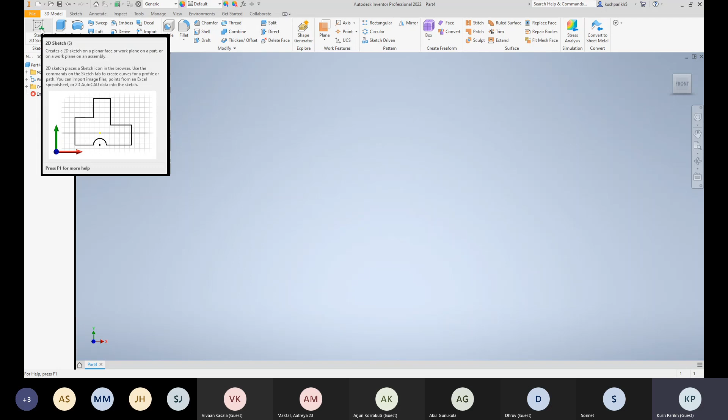So you want to start off by pressing Part, if you didn't see me do that already. Once you press Part, you want to press Start 2D Sketch. This is where you'll be making your two-dimensional shapes and all that. So click that button, and you'll see three different planes. For our purpose, we'll just use the XY plane, which is this one. So click on that.

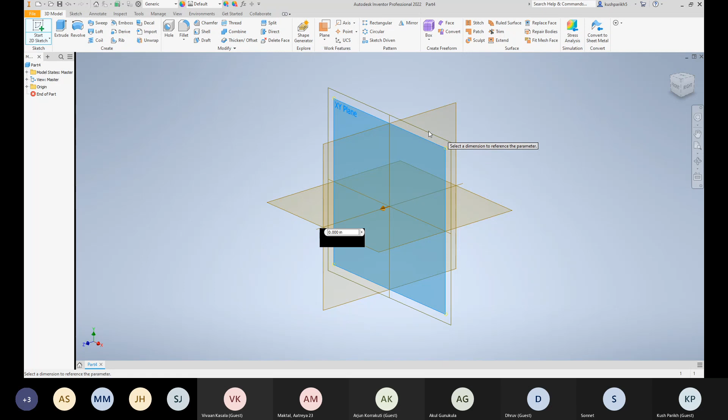I think my computer's lagging a bit. Alright, there we go. So you guys see that, right? Alright, so I'll go over line, circle, arc, rectangle, and maybe a few of the constraints. First, in Autodesk, if you want to zoom in and out, use the wheel on your mouse. Everybody should have a mouse, or else it'll be really difficult to use Autodesk. Also, if you want to move around side to side, press the wheel down and move your mouse.

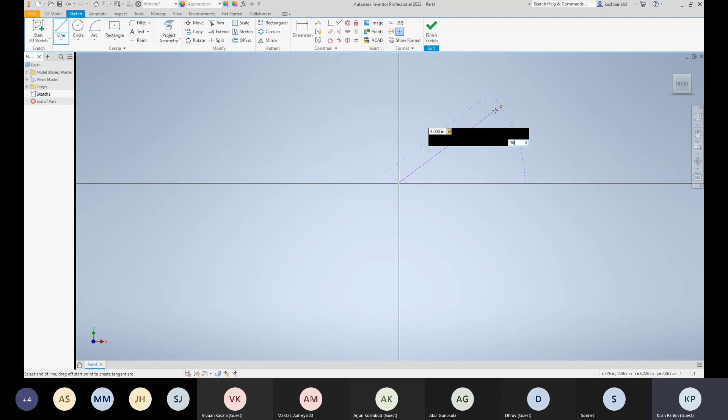Alright, let's start with a line. Press line, and then we can make a line like this. You'll see there's two different dimensions this type of line will take: one is the length, let's make it 4 inches, press 4, then press tab. And then the angle, let's do 30 degrees, press tab. Then exit, and press escape if you don't want to use the line tool anymore. As you can see, there are two dimensions, 4 inches for length and 30 degrees for the angle. This line is black, which means it's fully constrained. At the bottom right it says it's fully constrained, and if it's not fully constrained, the thing will appear purple.

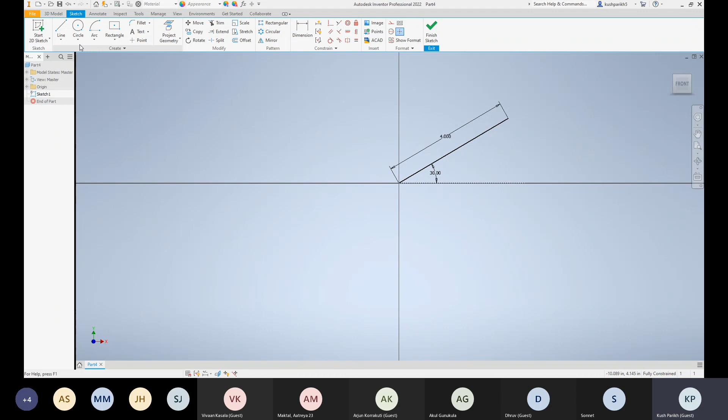Let's do a circle. Let's start at the origin. This only takes one dimension, let's just set it to, I don't know, 8. You'll see the circle is also black, meaning it's also fully constrained. Let's do an arc. For the arc, make sure to press center point arc, not the 3-point arc. We'll do center point.

Pick your center point first. Let's do the origin. By the way, the origin will always have a point automatically on it, so you want to be sure not to delete that, or else it'll be really difficult to put points at the center. So let's put one parameter as, I don't know, 5.

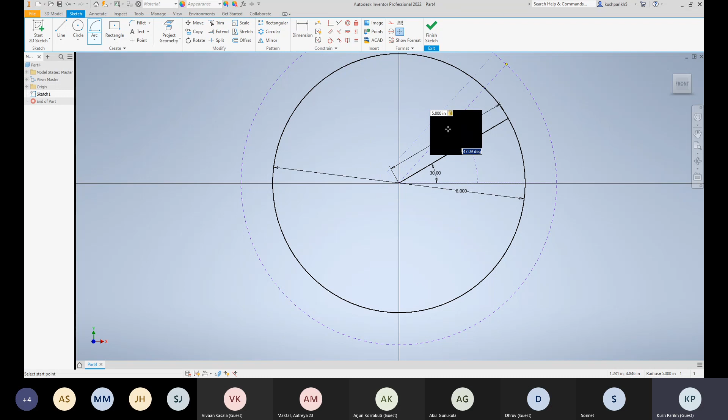Press tab, so 5 inches. And then the angle you want to start at—let's start at maybe 45 degrees. Press tab, click away.

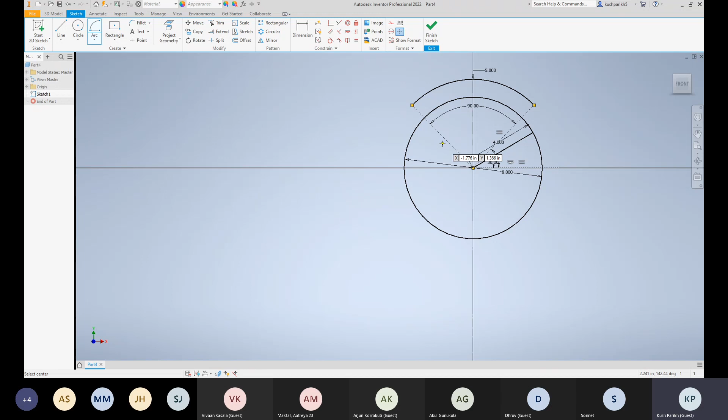And then you want to see how much more you want to go. So let's say I start at 45, let's go 90 degrees more. Press tab, then exit. You'll see over here that you have an arc. It starts at 45 degrees, ends up at 135 degrees, and from the origin or the center, it's 5 inches away.

All right, so that's an arc. Also make sure to press escape every time you're done using the tool.

Rectangle—let's try to do a 2-point center rectangle, so this one. Also let me know if I'm going too quick for you guys to follow, if you want me to do something again. So press that, and for this type of...

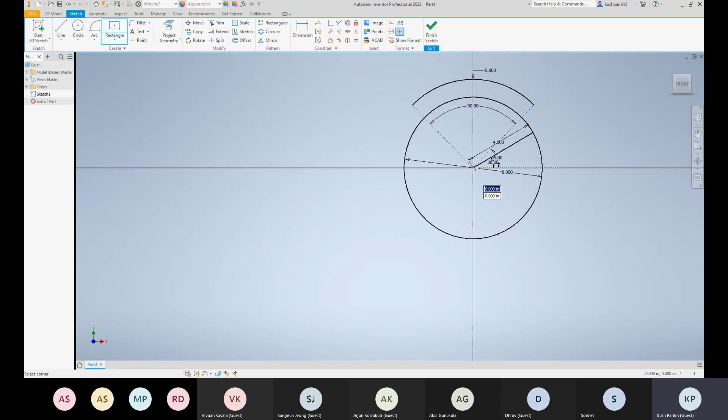All right, cool. So this type of rectangle takes 2 different inputs. One is going to be your center point, which I'll do as the origin—actually take 3. And then you want to figure out the length and width of your rectangle. So let's go 8, press tab, and 10, press tab. Right, so that's your rectangle.

Click away, and once again, your rectangle should be black, which means that it's fully constrained.

Press escape. Let's see, Sonnet, Dhruv, do you guys just want me to show some of the constraints now, or?

Yeah, I think—hold on, so you covered everything before, right? Let's go to questions now, because does anyone—make sure that everything we covered so far is understandable. Does anyone have any questions of everything we covered so far?

I can also—Sonnet, or you can also do a separate demo, or will you draw something else? Okay, wait, so you're telling me to draw something else? Yeah, you can draw something a little bit more complicated. Okay, that's fine. All right, so if you guys all understand this, we can move on.

So, okay, if I want to delete something from this, there's 2 different ways you can do that. One is starting at the top left and pulling down—that makes a red box. And the second way is to go from the bottom right and pull up, right? And that's a green box.

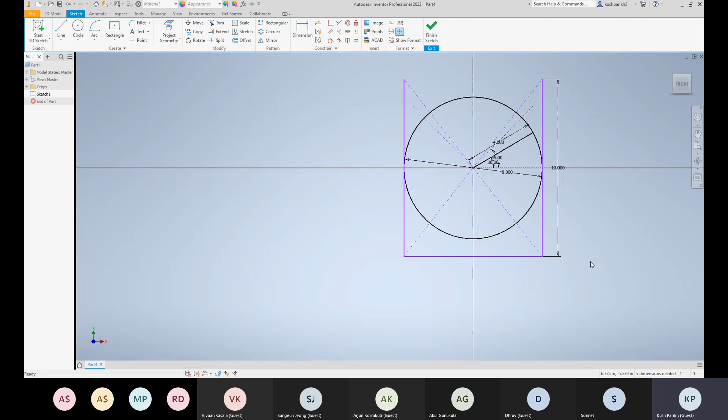It seems like the top of the rectangle is also entirely part of that. And if I want to go from the bottom right and pull up, then everything that touches that box will get deleted. So if I do this, then all of this gets selected and I can press delete, right? And same thing here, I can do this, delete. So everything's gone, right?

Okay, Sana, why don't I just try to add maybe a face to the snowman and go over that in a little more detail. Yeah, sure. What do you think?

Okay, cool. So we'll start off by making a snowman again. We'll see if we can add maybe some sort of face using the tools that we just learned.

Also, another thing before I go on is that if you don't set your dimensions at the beginning like this—let's say I just do that—then it'll appear purple. And the way you make it go from purple to black is you fully constrain it, using the dimension tool.

So you want to click on the dimension tool, press the circle, and then you'll see it's 9.077 inches, and you want to change that to, I don't know, 8. Press enter, and now I guess you want to give it a point as well for where it's centered. So let's see.

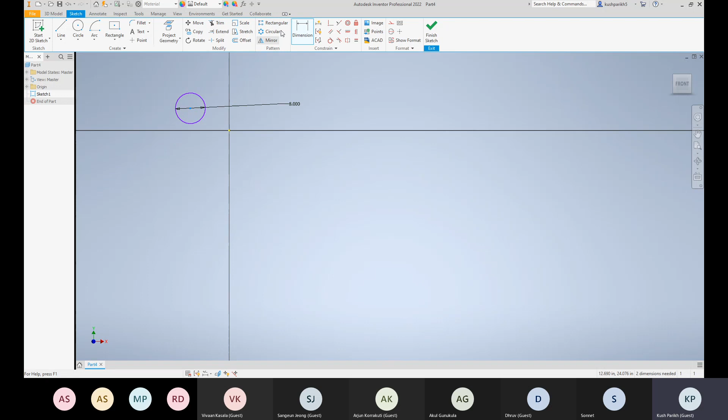I don't know, why is this not constrained? Okay, let me redo this.

Say I start this just over here and I don't give it a dimension. Then I press dimension and click on this, and let's say I want to change it to 40. Press enter, and it's black, right? Every time you don't give all the dimensions you need, it'll appear purple. If you want to change it to black to make it fully constrained, you have to click on the dimension tool. Okay, now that that's over, let's try to make a snowman.

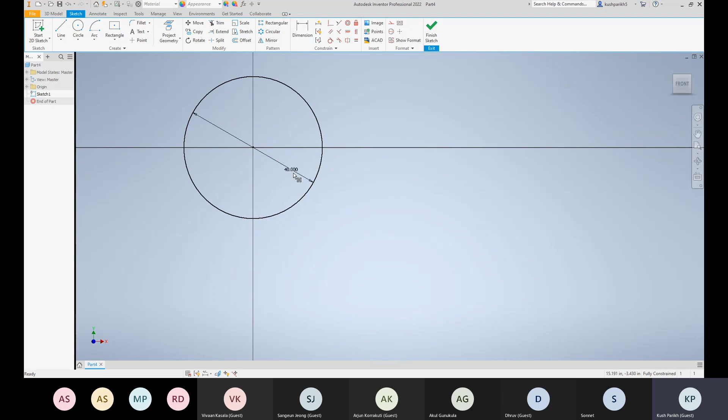Actually, we can keep this, so let's say this is 40. Let's make another circle, like this—let's make it 30. Let's make another circle, 20.

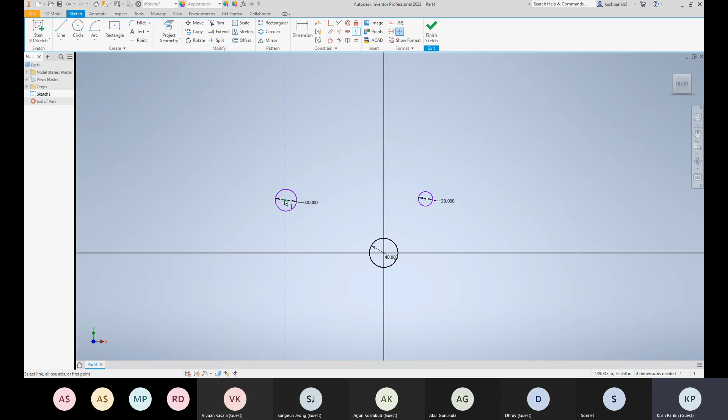Now what I want to do is put these 3 circles on top of each other. The first step is to press escape, then use the vertical constraint tool. Press the center of the 30 circle and the center of the 40-inch circle, and they'll be aligned vertically on the y-axis.

You want to do the same thing with the 20-inch circle, so press the center of that and the center of the 40-inch circle, and you see how that's all vertically constrained. Then escape or unpress that, and make sure all 3 of these circles are tangent to one another.

Let's do tangent. Press tangent, and now let's press this—the 30-inch circle and the 40-inch circle—and you'll see that they're on top of each other now. Notice also that both of them are black, which means they're both constrained.

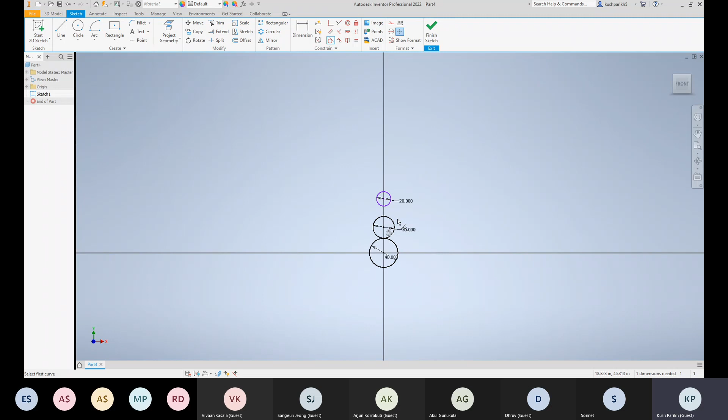Let's do the same thing between this circle. Press the outer part, then press the outer part of this, and both of them are tangent now. As you see, all of them are black, which means all of them are constrained. At the end of the day, just like Dhruv mentioned yesterday, you want to make sure everything is black.

Okay, so now let's try to add a face. Let me escape this. Let's see, what do I want to do? Let's try to add 2 eyes. So let's put a circle here, let's make it 6. And let's do another eye over here, let's make that 6.

All right, so now we have these 2 eyes. Now what do we want to do with the eyes? Also make sure to press escape after you're done using the tool. I guess we have to make them both symmetric to the center.

So what I'll do is create something called a construction line. A construction line is something that's not part of the actual sketch, but it can be used to reference other shapes onto that line. I'll show you what I mean.

First, let me just create a line. Let's say it goes from the center to the center, the origin. All right, then press escape. You'll see this line is already black, which means it's fully constrained.

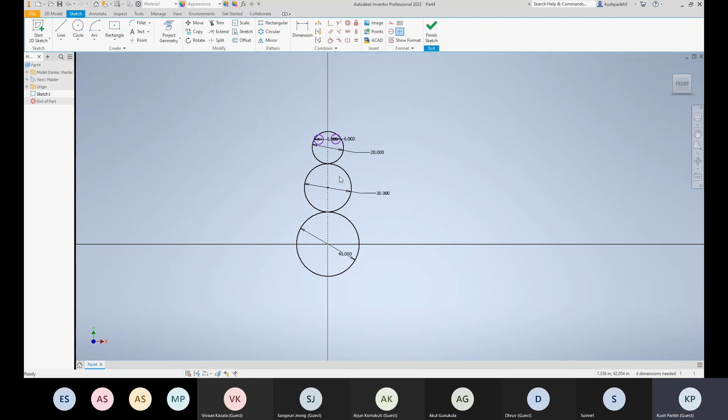What you want to do is hold shift and then press this line, and then press this over here—it says construction, you want to press that. If you press that, the line should become dotted, which means the line is not going to be part of the actual sketch, and it's just going to be used to reference.

So now we have both of these circles, and let's make them both symmetric to this line we did over here. We'll use another constraint tool called symmetry—press the centers of these 2, and then press this line.

Press the construction line. This is the line you want to have as your axis of symmetry. Press that. Okay, cool. So now both of them are symmetric about the center line.

And now, what do we want to do? Let's make sure the eyes are inside the actual head. The way we do that, first make sure to press escape, and then we can use the dimension tool.

These are purple again, which means they're not fully constrained, so we can still edit the dimensions between them. So let's click the center of this circle.

Wait, Kush. Before you dimension them, click escape. I'm going to show you something. Drag the center of a circle outwards, just one circle.

So you guys see how when he drags one of the circles outward, the other one moves too. No matter what he does, the two circles will be symmetric. That's what the symmetric constraint he used does.

It just didn't move there because it was already pretty well placed, but if he changes the location of one of the circles, the other one will change. Okay, yeah, all right, cool.

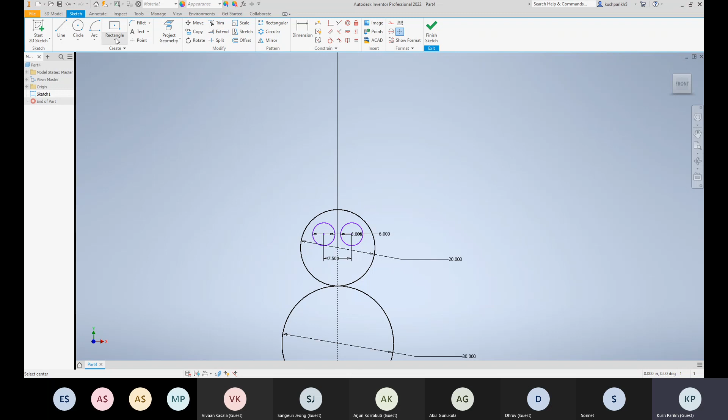So let's use a rectangle. Make sure to press 2-point center on the rectangle. Let's have our center at the center of the face. So right here, the green dot, press that, and then we can make our nose.

Let's see, how do we want to do this? We can do like 4 and 2. So press 4, press tab, then press 2, and press enter. You'll see this nose rectangle is already black, which means it's already fully constrained. Let's press escape so you don't make another rectangle.

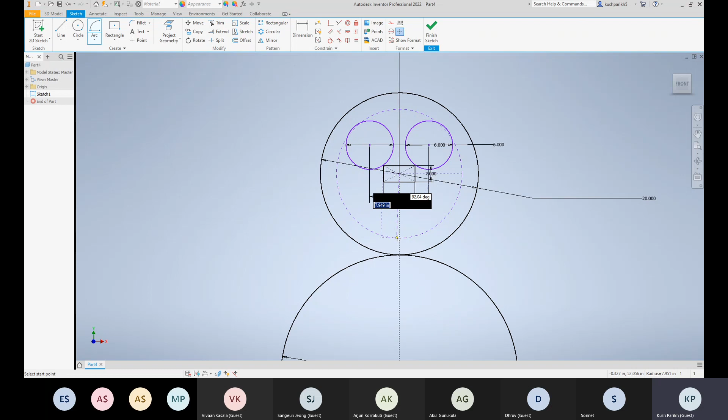Let's use the arc tool to make a smiley face. For the arc, make sure to press center point arc once again. We'll also have our center at the center of this circle. Let's just do 8 inches for the radius.

Press tab, and let's start this one at 0 degrees. Press tab, and then we want this to go all the way to 180. So 180, and press tab. There we go. As you can see, the arc is already black, which means it's already fully constrained.

So the last thing we can do for this smiley face is constrain both of the eyes. One of the ways we can do that is create a construction line between these two eyes. So press line, start from the center of the left eye, go to the center of the right eye, select that, and then press escape.

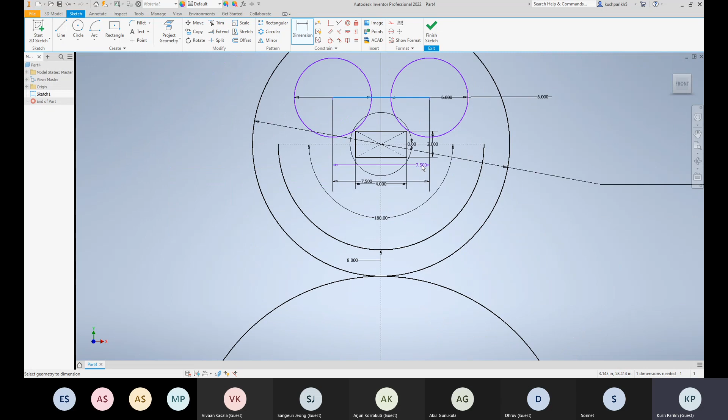So for this line, what you want to do is take the dimension tool and press the center of this line and take it—oh shoot, what did I press? Let's see. Do you guys know I can press the center of this line?

What's up? What do you want to do? Basically I want to constrain these two eyes, which are symmetric to each other. Didn't you already hit the symmetric constraint?

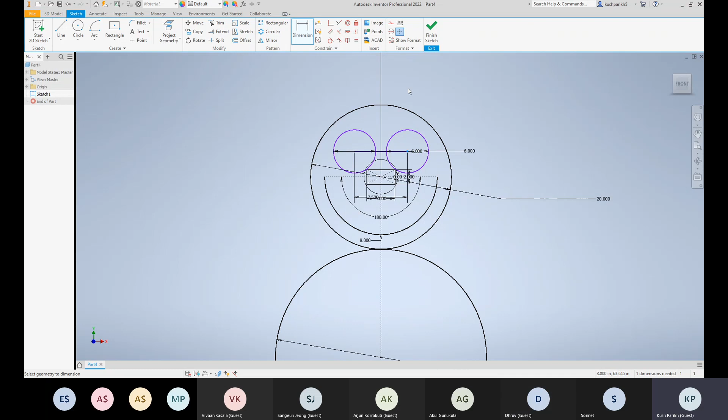Yeah, but it's not fully constrained yet, it's purple. That's because it can still move up and down. Oh, okay. So what do you want to do? Maybe just constrain it somewhere, put it somewhere.

Okay, so what you can do is see that dot at the center of the black circle? Make it coincident with the line. That line, yeah, that's it. All right, go ahead.

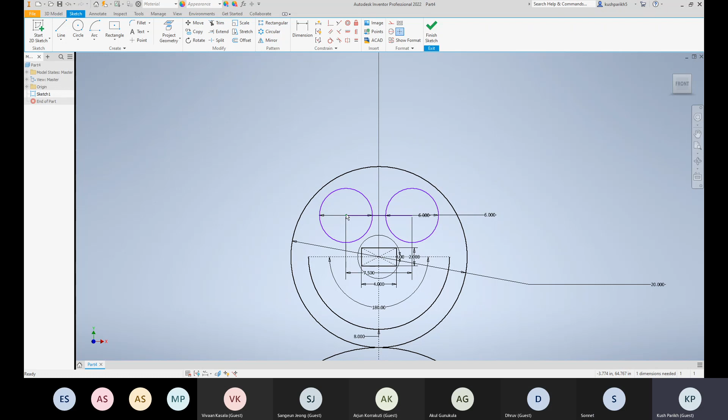Use a construction line. This is a good place to show them how to use construction lines too, if you want to do that. So you guys see the line I made between this left circle and this right circle? You also want to make that a construction line since you don't want it to be part of the actual sketch. Let me zoom in a bit so you guys can see.

What you want to do is hold shift and press this line, then press this button over here which says construction. So if you do that - okay, it did not work. Just select it and click the constraint. Wait, it still didn't work.

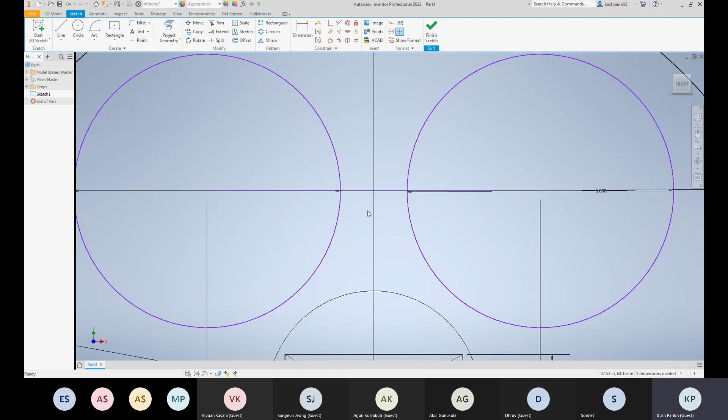Click the constraint first, straight. Wait, are you selecting the line or the dimension? Oh wait, I'm pretty sure I'm selecting the line. Okay, so click escape first.

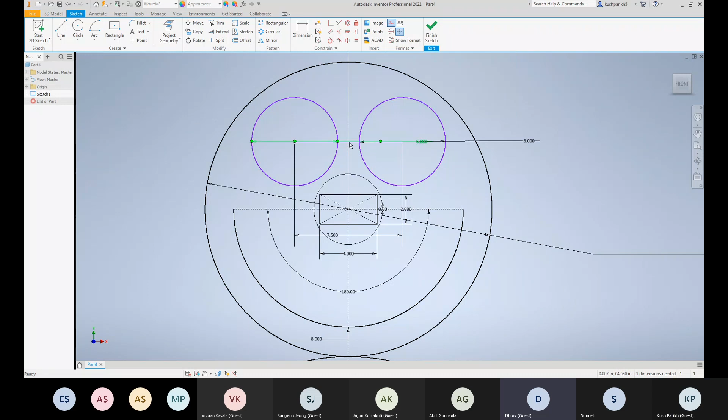Click the constraint, like the red thing at the top. Right, now click line. Wait, constraint or construction? Yeah, that's good, construction, that's good. I think you might be selecting the dimension.

So try moving the dimension out, by the way. Grab that 6 and push it up. Just move the dimension away. Wait, what? Okay, hold on.

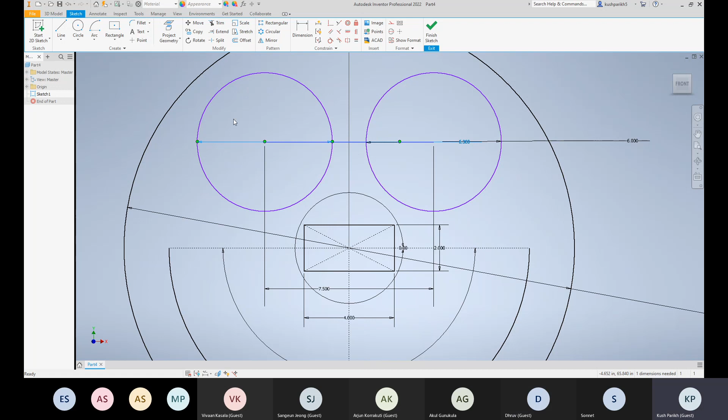Okay, stop moving. Yeah, okay, let me try to undo what I just did right now. Sometimes you might want to undo what you're doing.

So again, to do that, maybe select the bottom right thing. I'll select this dimension and press delete. All right, let me try this again.

So, line from center of this to center of this. Press escape, then hold shift, press this line, and then press construction. Okay yeah, there we go. So you see this is a dotted line now, which means it won't show up in the actual sketch.

Also define that left circle - it's not, the 6 inches is gone. Define the line, the left one. The left circle - the diameter is not defined. Oh okay, got you, okay yeah.

So sometimes I accidentally deleted the dimension for this. Okay, press dimension, press the circle, and make it 6. All right, okay, so now we have a construction line, and let's move it a certain distance.

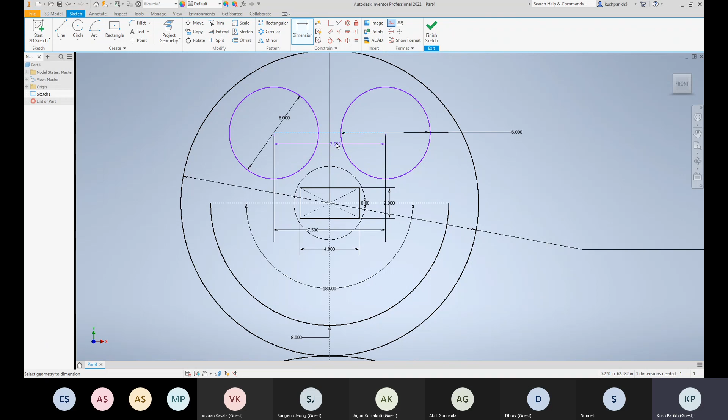Let's move this line, which is connected to these 2 circles, a certain distance away from the center. Press dimension, which I already have selected, press the line, then press the center. You'll see this dimension pop out, and you want to edit that to, let's do 5. There we go. Okay, so now both of these circles are black and everything is fully constrained.

So if we were to zoom out, I'm not gonna lie, the snowman probably looks a bit ugly. But once we start making everything 3D, once we do extrusions and all that, it'll start to look a bit better, especially when you can change the materials.

Kush, you can honestly take it farther and show them how to add buttons to the body and arms and a hat, because it's just more line practice. You guys should definitely pay attention, because you'll be drawing something for homework comparable to this in difficulty. So when Kush is going over steps that seem redundant, it's giving you more practice in preparation for homework. Okay, press escape, exit the dimension tool.

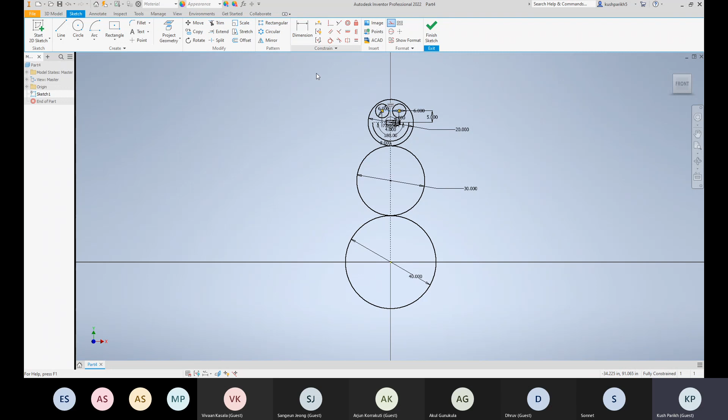Okay, so first, let me add a button to this snowman. Press circle, and maybe just add a random button here. Actually, you know what, let me not do that. Let me just make the button here, and then we can vertically constrain it.

Let's give this a dimension of, I don't know, 5 inches. And then we can move this button, or vertically constrain this button to the center. So unclick dimension, press escape, and press vertical constraint. And press the center of this circle to, I guess, here. All right, there we go.

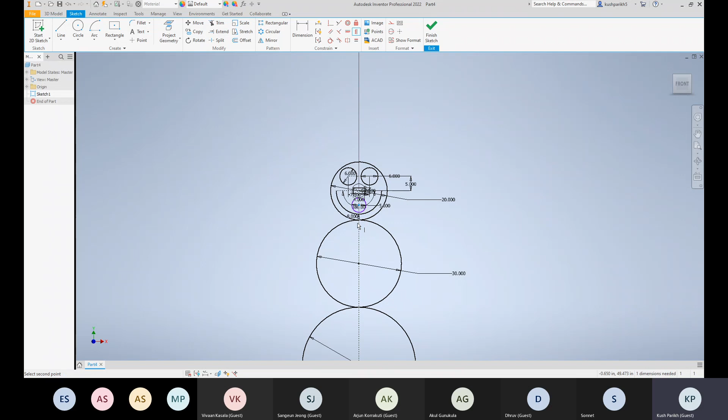So now, I guess we can move this. Let me press escape and then move this down. Move this over here. So instead of continuously making more and more buttons, we can use a tool to make multiple in a row. Do you guys remember which one that was called?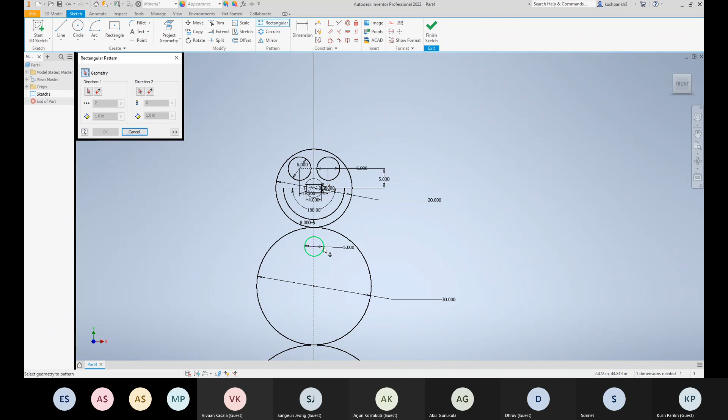All right, so we can use a rectangular pattern to add multiple in a row. So let's see, you want to press this circle and press direction.

All right, there we go. So once you press that button, it'll show a direction, which is down. So you don't want the buttons to go up, you want it to go down.

And then we can choose how many we want. I guess you can use a bit of guessing here, how many will fit. I'm gonna guess that maybe 4 will fit. So I'll do that, and you can choose how far you want them apart.

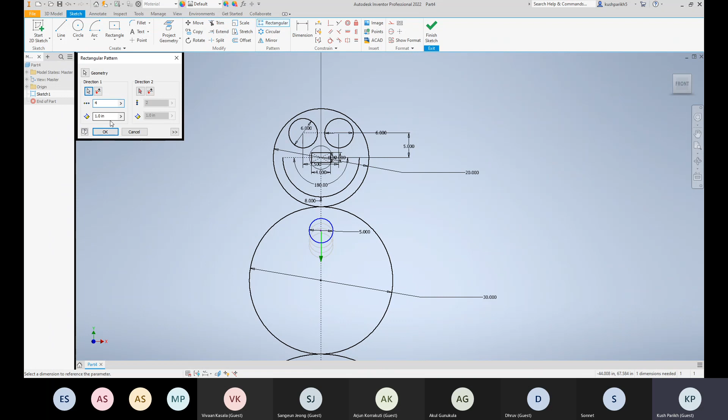So obviously 1 inch, I don't know if you guys can see this, but it shows kind of a gray outline of where the buttons will be. Obviously 1 inch is not good enough. Let's make this 6.5. Yeah, I guess that looks good.

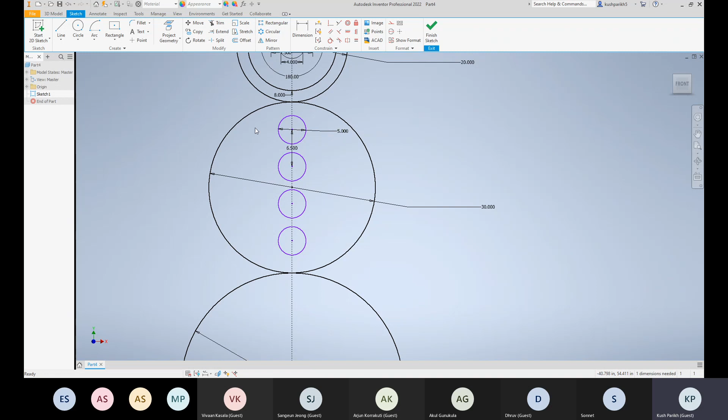And then press OK. So now these buttons are all in a rectangular array on the body. That's one of the ways you can use the pattern tool to add more instead of creating multiple and then putting them in the center. You can just use that tool.

Okay, I don't know what else I can do. Let's add a hat to the snowman. Why not?

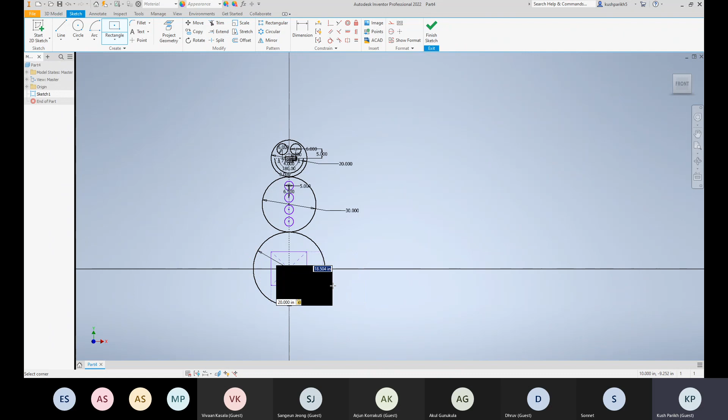Let's see, use the rectangular, let's use 2-point center. Let's make this the same diameter as the top one. So let's do 20, press 20, tab, and then I don't know, 10. Okay, yeah, there we go.

Oh shoot, I constrained this, didn't I? Okay, let me undo that. So let's just make a random one, like over here, press 20, tab, 10, tab. All right, and now this is purple, so we can still move it around if I press escape.

So what we want to do is vertically constrain it to the center and then make them tangent to this head. The way I'll do that, it's the same thing. Vertical constraint, press the center, and press the center of this, and then escape. The tangent tool, press this and this. Ah, there we go. Okay, so that's the hat.

I guess we can have like a narrow top, so we can add one more rectangle. Let's do that. Let's make this 10, tab, 20, enter.

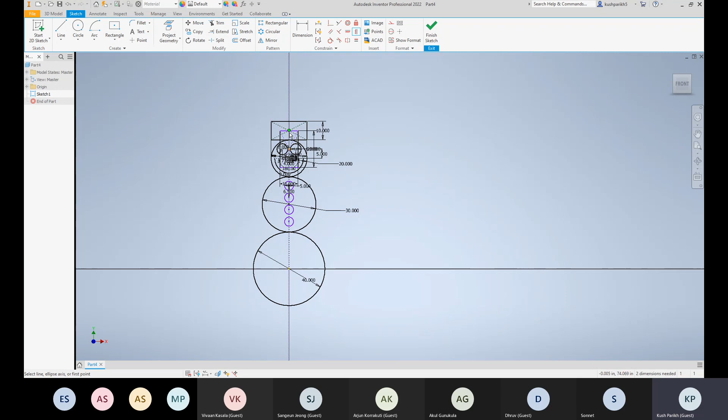All right, and then let's see, press escape, vertical constraint, press the center, and then center this. There we go. That was actually probably a bad idea. That's fine, press escape. Okay, we can move this up and down, so that's good.

And then I suppose you want to make this tangent to this face as well. So you can press the tangent tool, press this side, this side, this side, and this side.

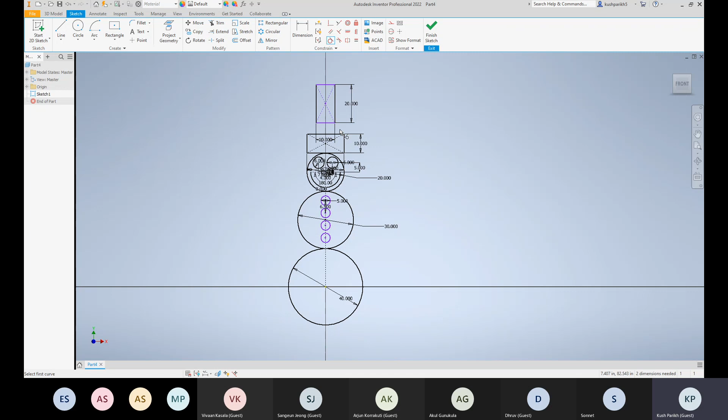I wonder why it's not working. I wonder if this works. Okay, yeah, there we go. So let me undo that.

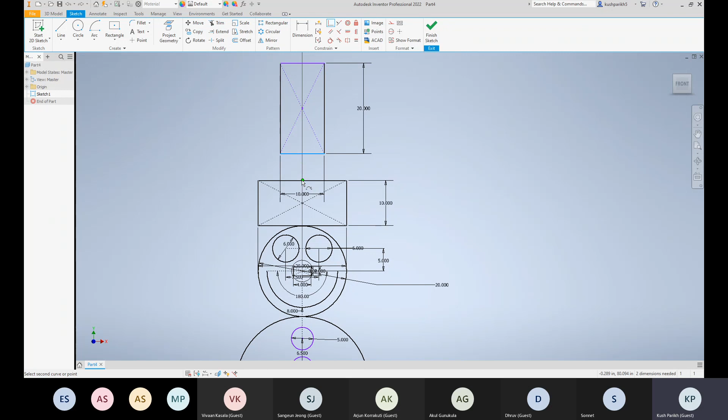All right, so another tool you can use is the coincident constraint. That'll just put two faces together, or 2 points in a line together. So you want to press that, press this face, and then press this point over here, and it'll go on top of each other. And I guess I added a hat. What else?

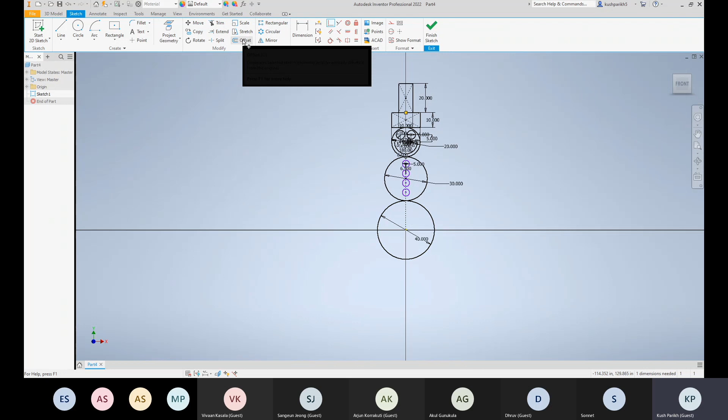Maybe we can add a little bit more detail. One of the tools you can use is offset. Let's say you want another circle to go inside this circle and make it a little smaller. Press the offset tool, press the circle, and choose how much to offset by. If you put it right on top, it offsets by 0 inches, but otherwise it offsets by a certain amount. Let's do 5.

Press enter. So that's fully constrained as well. What else can I do? Sonnet, you don't want me to go into 3D and all that, right? Yeah, I think we're saving that for tomorrow.

If you want to add arms, you can add arms. Otherwise you can just call it a day. Sure, let's add arms. Let's press the line tool again, make sure to escape everything else, and then pick a point on the body and extend it out. Oh shoot, I didn't do it. Let's see, I want it to escape.

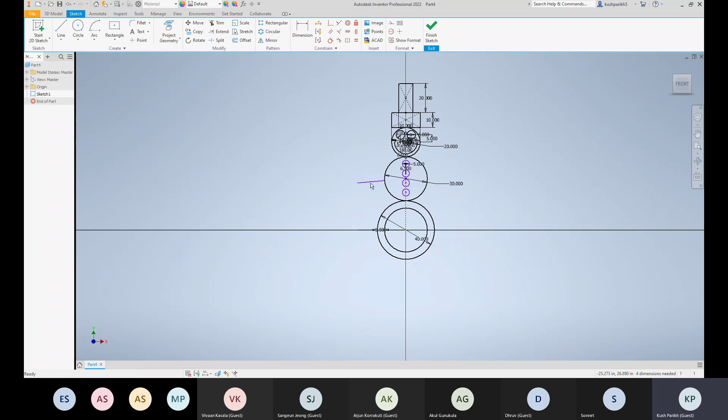All right, let's use the dimension tool. Okay, that's not the dimension I want. Yeah, this dimension. Sometimes you have to press the dimension tool a few different times to get the exact length you want, because sometimes you'll get the vertical component, the horizontal component, or the actual length of the line. So make sure you're editing the actual length. Let's make this 30.

Press enter. Another dimension you can do is the angle between. Oops, didn't mean to do that. Press escape, dimension. Let's do the angle between this. Escape.

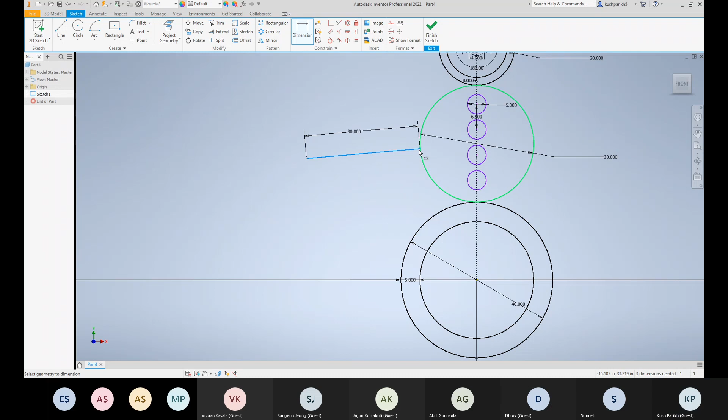Do you guys know why the angle thing is not working? What are you trying to angle? The angle between this line and this point. Yeah, you can't angle between a line and a point. You can only angle between stuff like two lines.

Okay, so in that case I think we just had to set the angle before pressing enter. Sometimes this happens, so you can just delete it. You could also have put a construction line as horizontal and then done it relative to that. Okay, sure.

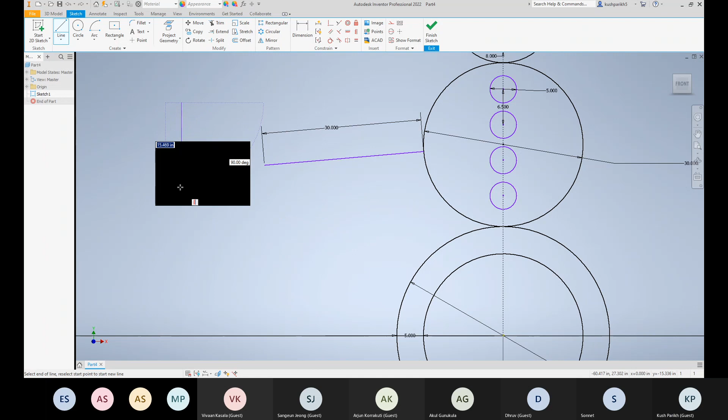Let's press the line tool again. Let's go 90 degrees. We can make this however long we want, let's make it 5. And let's go 90 - so this is going to be a reference. You can move this line right here. Actually, we can press the tangent tool - press this, and then right over here, and make it tangent.

Sonnet, do you know why this is not working? Tangent. I think the lines might have to be touching, right at this point. Do you know how? Because if I press tangent, it just doesn't work. So I could just extend this line. Hold on.

Okay, it already exists. Let me redo that. No, you don't have to delete it, you can just double click the original dimension. Oh okay, nice. Let's just make this 50.

Do you want to show them how to change metrics, like change measurement systems? I personally don't know how to do that. Okay, yeah guys, so in the edit dimension, can you double click that for a sec? Like any of the measurements for dimensions, like 50 or 30, that works. You guys see how it says 30 inches? You can change the inches part to say centimeters or something like that.

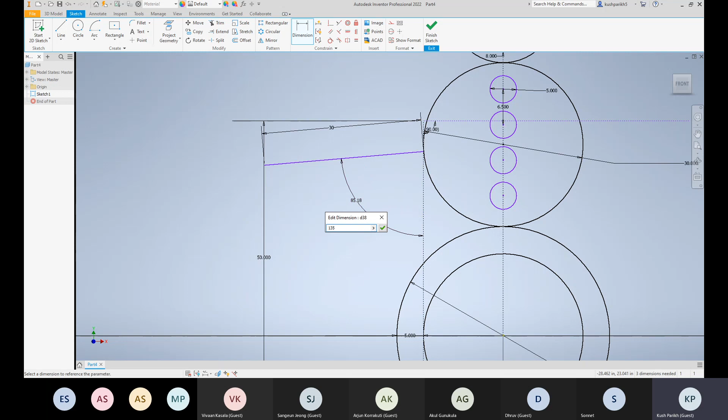Press dimension on this line, and then this line, and then you see an angle over here. So let's make this angle, I don't know, 135 degrees. Press enter. Okay, so now you see this arm is kind of going up. And that's, I guess, what we want, right?

And we can do the same thing on the other side. But instead of doing the whole thing again, we can just mirror it. So let's see, center. Escape. Right now I didn't fully constrain this, that's fine. We can use the mirror tool over here. We can select this across the mirror line over here. Press done.

Alright, so this is the mirror line, and then this is what I want to apply. There we go. So use the mirror tool and you can just put it on the opposite side. Press done, and there we go. So now we have two arms sticking out on both sides and we used the mirror tool. A lot of the times if you guys want to use symmetry, you can use the symmetry constraint or you can use the mirror tool. Both of them work.

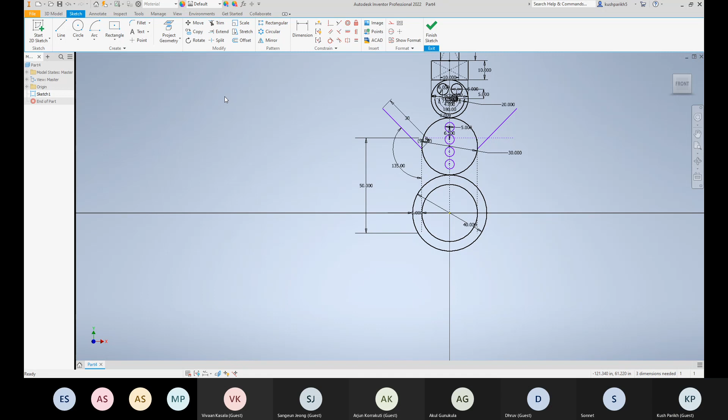Sonnet, do you want me to cover anything else? No, I think you did a pretty good job going over a lot of stuff. Okay, cool. If you guys have any questions, please feel free to ask while I'm still on this. Yeah, you guys ask Kush any questions right now if you want him to go over any tools.

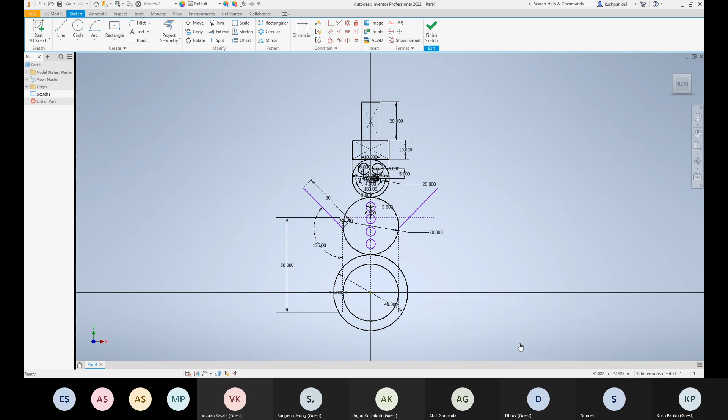Sangeun, I think since you and Kush are having the same issue, me and Dhruv will both troubleshoot today and get back to you guys tomorrow. So you don't have to stay behind, because probably more than just you two are having issues. But yeah, you guys are all free to go. Bye. Hey Kush, are you still on? Yeah, I'm here.